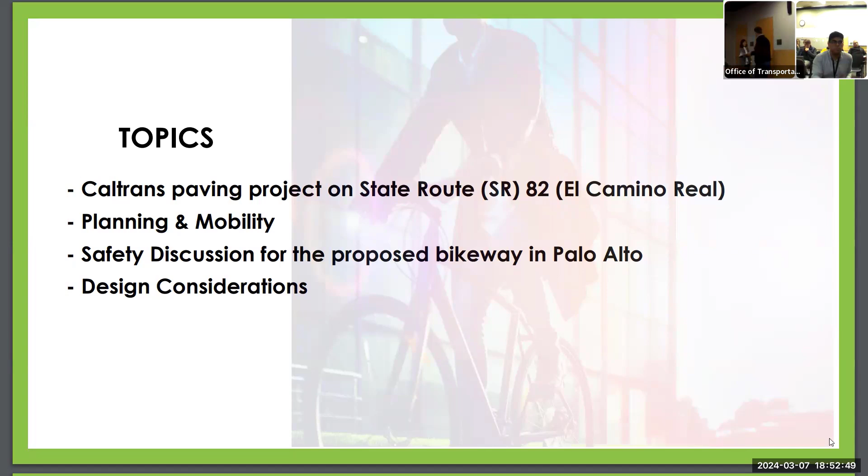Good evening, everyone. I'm Yumi Choi, Caltrans project manager. Tonight I'm going to provide you the overview of Caltrans' paving project on State Route 82, El Camino. The project limit is between the city of Mountain View and the city of Palo Alto. The construction cost is approximately $30 million. The main project scope is the following: pavement rehabilitation for asphalt concrete pavement and concrete pavement, upgrading curb ramps, driveways, and sidewalks to meet ADA standards. We're going to apply high visibility crosswalk pavement marking, as well as upgrading traffic striping pavement marking. Electrical work will include APS for crosswalks, pedestrian hybrid beacon systems in the city of Mountain View, and upgrading signal poles at several intersections. Also, we are adding new bikeways in the city of Mountain View and the city of Los Altos.

We are proposing new bikeways in the city of Palo Alto under this project. The new bikeway facilities will be implemented right at the new pavement. That's why we are here to provide you the new bikeway information. For schedule, construction has already begun, and we anticipate completion in the fall of next year.

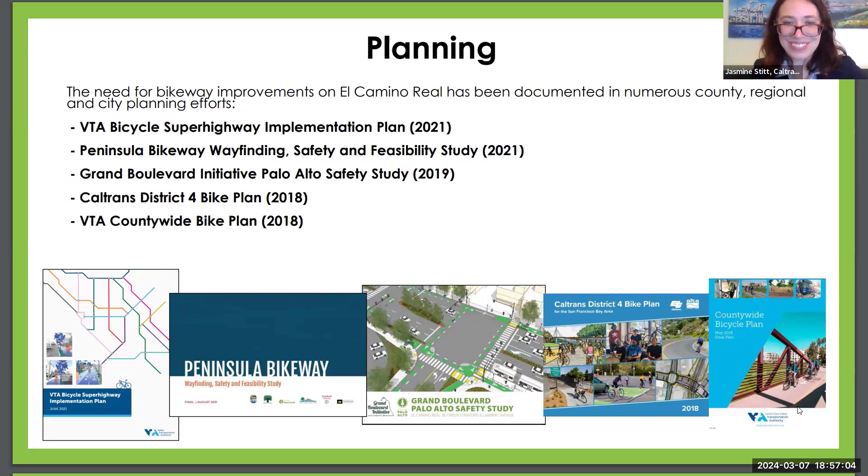Multiple bikeways are anticipated to be installed on El Camino as part of Caltrans' pavement maintenance projects throughout the counties. El Camino provides the most direct connection from San Jose to San Francisco.

Implementing a separated bike facility would provide the best and least circuitous route to jobs and activity centers for people biking and to provide regional connectivity. Providing comfortable bikeways on El Camino would link to the existing bikeway network and improve safety, including for those who already bike ride on El Camino.

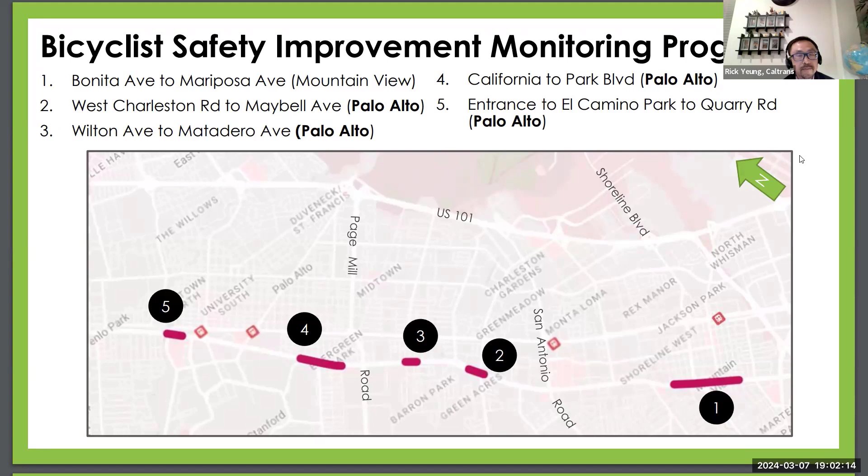Let me get into the description of the crashes and some of the statistics. From 2016 to 2020, across all 5 of these highway segments, we had 33 crashes involving bicyclists. 32 of them resulted in injury, and 1, unfortunately, was a fatality.

I want to point out two things about these numbers. First, the fact that we have 33 crashes tells us more than just that we have potential conflict—it tells us that bicyclists are present out on El Camino Real. Some of them have experienced incidents, and so we really need to do everything we can to try to improve safety for these vulnerable users.

The other thing I want to point out: if you go back a couple of slides, I was talking about our safety priority and our vision. If you look at these crashes, these are injury crashes, fatality crashes. These are the exact crashes we want to focus upon and try to eliminate from our highway.

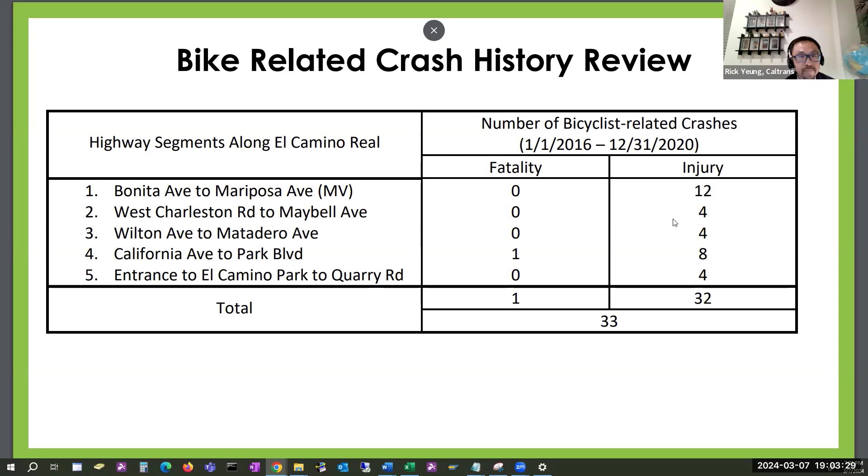When we break down the crashes by type, overwhelmingly, almost 80% of them were broadside. This is significant—in a broadside type of crash, the likelihood of injury to the bicyclist is significantly higher.

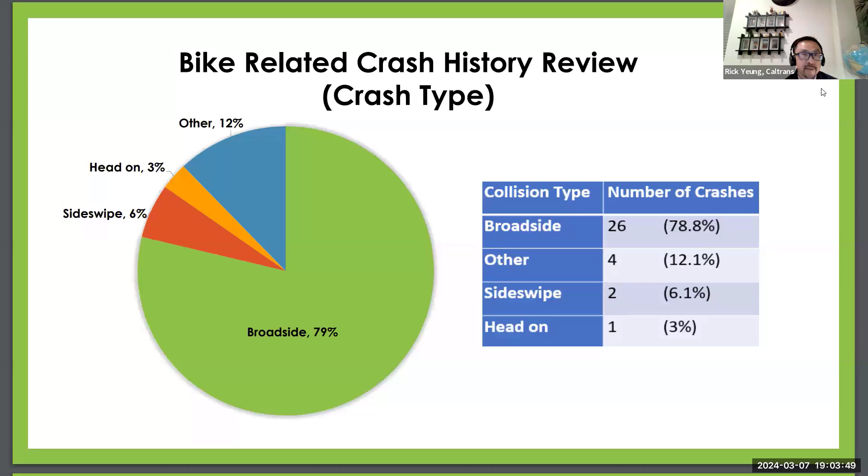We've also broken down the crashes by primary collision factors. Other violations was the leading factor at 52%. Failure to yield came in second at 30%.

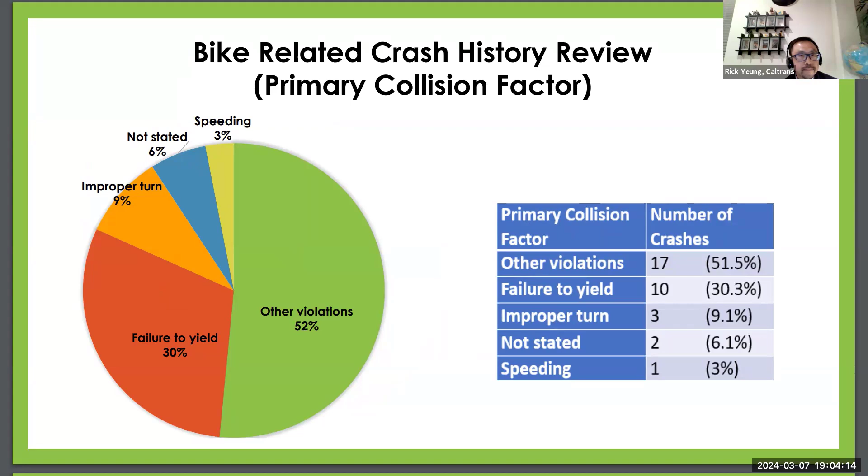In addition to looking at crashes by type or primary collision factor, we also group them into crash patterns so we can take a closer look at any underlying issue and identify potential mitigation measures. We've identified 3 patterns: first, driver's failure to yield; second, bikes going against the flow of traffic; and the last, red light violation.

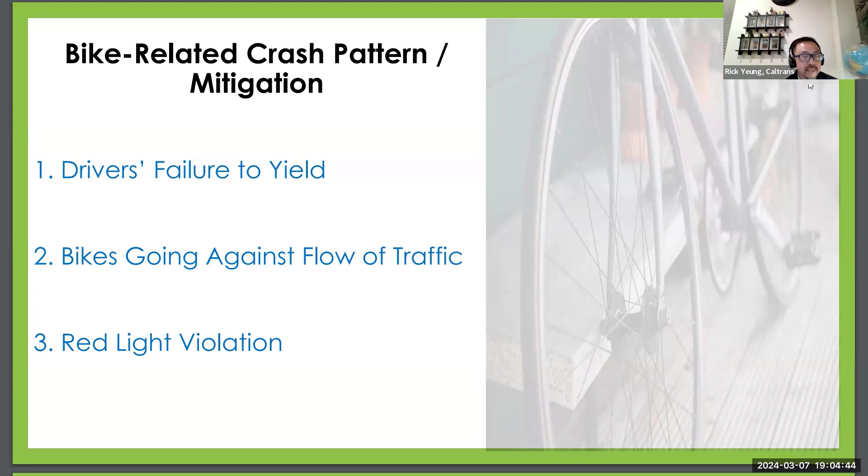The first crash pattern we found was driver's failure to yield. Some of the issues related to this pattern could be driver distraction, issues with visibility, or sometimes the right-of-way assignment simply isn't clear to road users. Some things we can do to mitigate this include upgrading and improving traffic signs and markings, ensuring clear line of sight especially at intersections or driveways, focusing more effort on driver education, and providing bike boxes at certain intersections to improve bicyclist visibility.

Our second crash pattern is bikes going against the flow of traffic, which includes both bicyclists riding on the street and on the sidewalk. Issues related to this could be a lack of designated area for people to ride bikes on the road, or a high stress riding environment on a busy roadway like El Camino Real. Potential mitigation measures include providing standard bicycle facilities where we can designate a portion of the roadway for exclusive use by bicyclists, and installing appropriate signs and markings to clearly indicate the direction of bike travel.

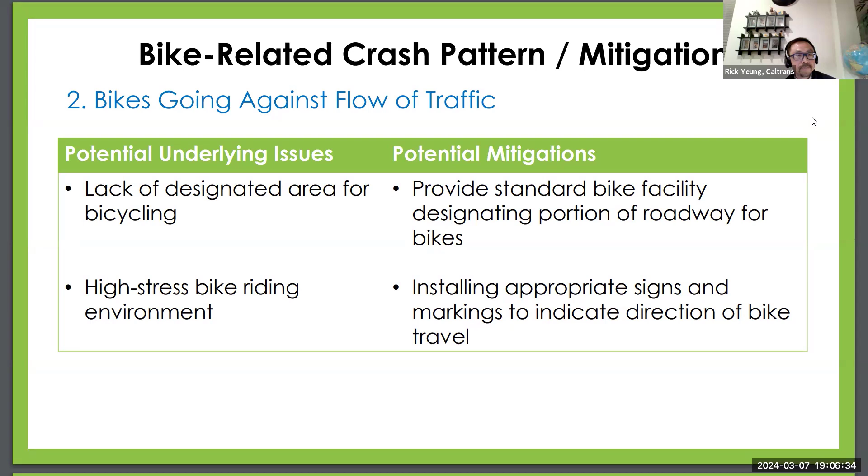Our last crash pattern is related to red light violation. Issues related to this could be speeding, or related to road users not being able to see the traffic signal. Sometimes there could also be an issue related to our signal timing.

Potential mitigation includes traffic enforcement, driver education, and working with our signal ops and maintenance department to make sure our signals are clearly visible to all road users, and checking our signal timing to verify the appropriate timings have been provided.

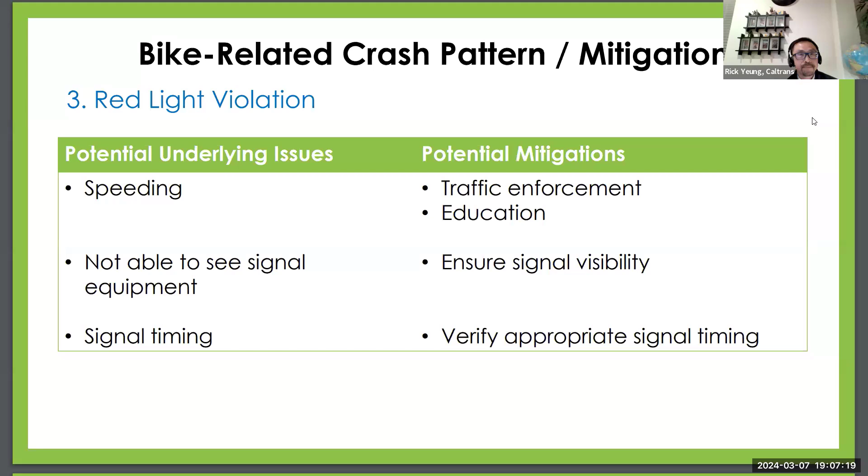Based on our safety review, we can tell that there are bicycle riders out on El Camino Real. There have been some incidents, and we definitely see a need to improve safety. So our recommendation is to implement a bikeway as part of the paving project on El Camino Real.

There are a number of benefits of having a bikeway on El Camino Real. I just want to point out a couple. Number one, it provides network connectivity that Jasmine mentioned in her portion of the presentation. It will reduce the incidence of bicyclists riding against the flow of traffic, reduce the potential for conflict between bikes and vehicles, and most importantly, it will improve traffic safety on El Camino Real.

I believe that is my last slide. Let me turn this back over to Nick and Yumi.

Thank you so much, Rick.

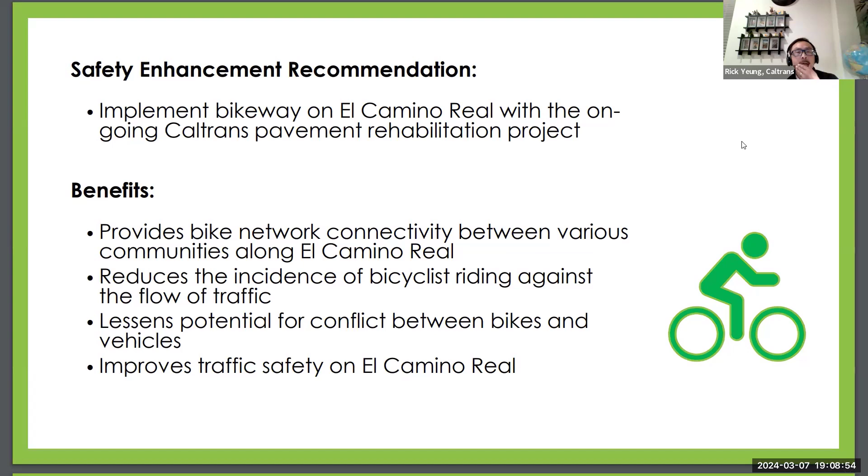We'll try to capture some of what went through the design, some of the considerations and constraints. Those constraints are right of way and on-street parking, intersections and driveways, and finally transit stops. We're going to cover each one of them with more details.

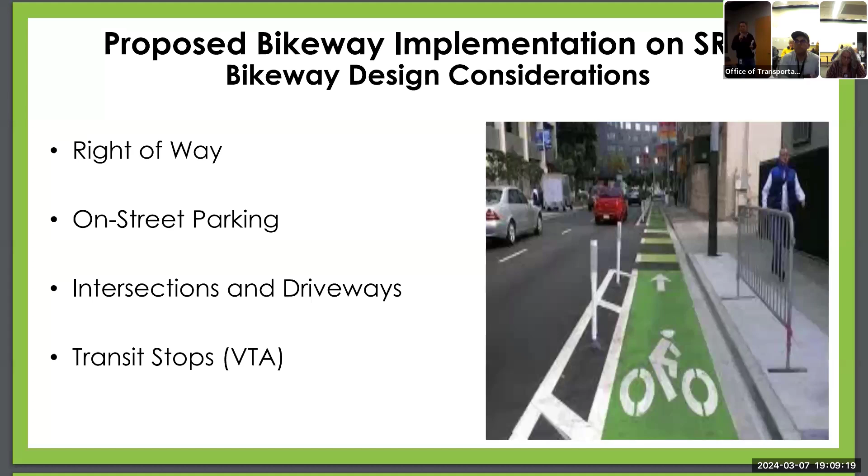As you guys know, El Camino Real is a very limited state right of way. It goes, typically in the corridor, from the face of the sidewalk to the other face of the sidewalk, though some cities differ. This project is not only in Palo Alto, it's actually across all 3 towns, so we didn't have a straight line for right of way.

The width of the right of way varies, going up to 130 feet in the best case scenario where it extends all the way to the back of the sidewalk on the side. But other scenarios are shorter, where the department only owns the face of the curb. In the case of Los Altos, it has only ownership of the sidewalk.

So with a limited right of way, that also limits and constrains your freedom to provide the full, complete facility as you wish, and we all wish.

Unfortunately, the current El Camino has 3 through lanes each direction, total of 6 both sides, and in some scenarios includes 1 or 2 left turn lanes each direction, and other scenarios have right turn lanes. So the width of the facility changes.

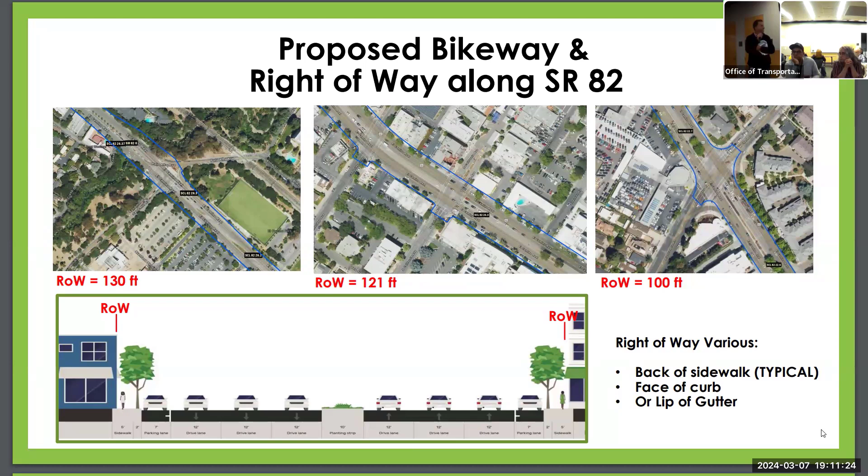Also, throughout the corridor between Mountain View, Los Altos, and the City of Palo Alto, there is street parking along the whole corridor. In the case of Mountain View and Los Altos, because they had an early start, they went to their city councils for resolutions to remove the street parking in order to accommodate the bike lane, creating more space or right of way to implement the bikeway.

In the case of Palo Alto, we anticipate it's going to impact around 603 cars or vehicles along the city. Again, this is a constraint — instead of providing a protected bike lane or Class 4 facility, it limits or minimizes your options, so you may end up with a bike lane that's Class 2 instead.

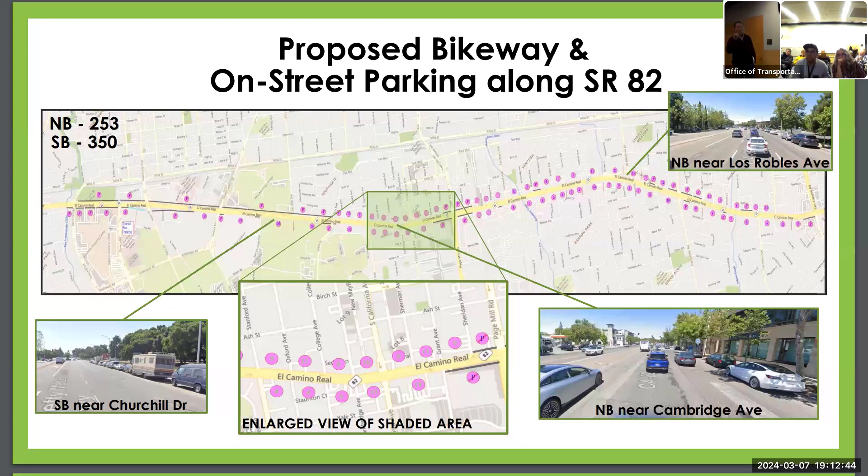This goes without saying, but a typical corridor like El Camino has a lot of driveways and intersections, which is very hard to manage because it also limits your freedom for continuous bike lanes and continuous Class 4 protected bikeways. This limits your freedom to implement a certain type and creates a lot of challenges. In addition, in some scenarios where you have a right turn lane, that also limits your options for a separate bike facility.

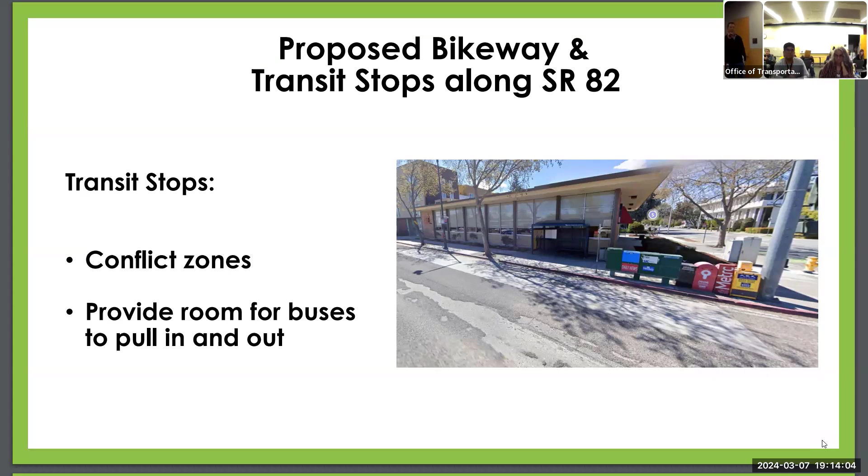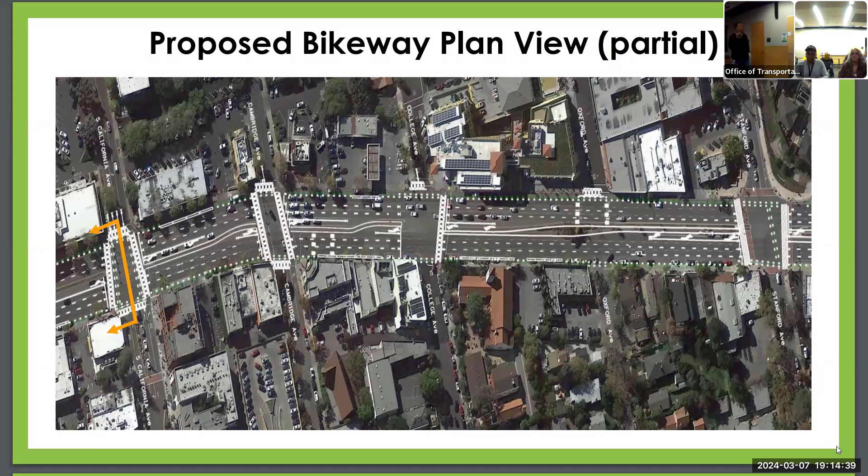Again, this is a typical section. It's not necessarily Palo Alto specifically, but through the corridor there are three through lanes each direction, in addition to street parking. With the proposed bike lane, in this case protected class 4, we'll maintain the through lanes and all movement in the corridor, and place the class 4 lane next to the sidewalk. This is typical through the whole corridor.

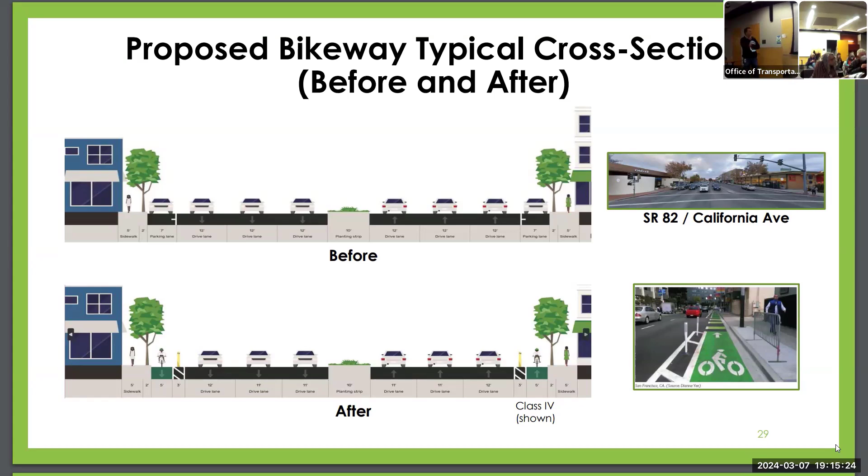This is another example of Palo Alto, showing how it looks today. I believe this is around California Avenue, and that's how it looks today. Hopefully after we finish construction, complete paving, and all the upgrades, it's going to look like this.

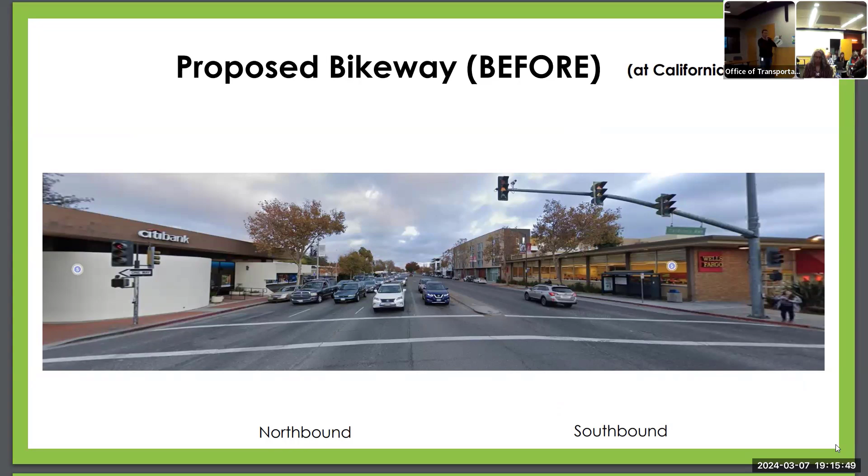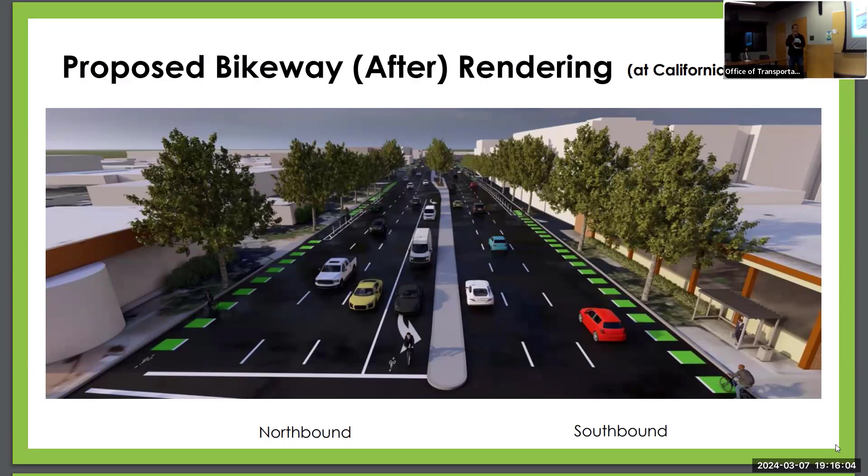So that's a typical section, picture, or imagination of how this is going to look.

We tried to look for other alternatives, considering a few things at a high level. Keep in mind these projects started as a paving project, a maintenance project to preserve the pavement and keep everything smooth, which badly needed a facelift. That was the original focus. But as Samantha mentioned, it's part of our goals and mission to improve safety and implement complete streets at the right time. We try to do things once rather than twice and waste resources, funding, and cause public inconvenience. So we considered all options to keep everything as we can.

In order to keep the street parking, we thought about various ideas. But throughout the corridor, it's very hard to implement a class 4 protected bike facility or any bike facility while keeping the existing street parking as presented today.

Another consideration we looked at, and actually did implement in some areas, was lane reduction within the allowance that still accommodates big loads and transit throughout the corridor. We reduced some lane widths from 12 feet to 11, and we're going to further look into whether we can go beyond this, in compliance with DIB 94 and other safety and geometric requirements, to see if that can free up more real estate throughout the corridor.

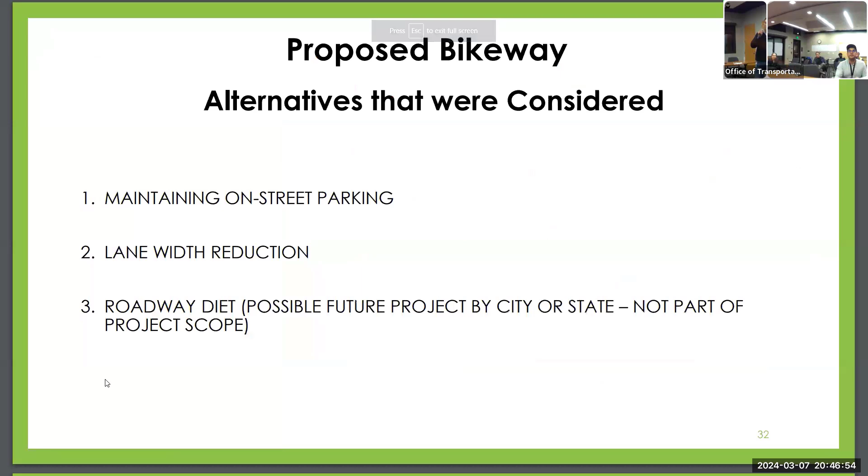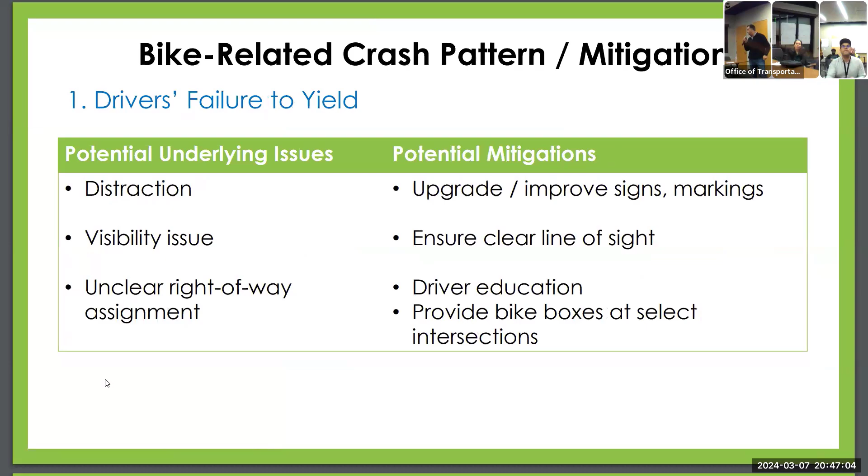Can you go back to that? I want to see the dates, but the project today is an active construction zone as we speak, and you could see a lot of trucks back and forth. The contractor has, I think, 200 or 300 working days to finish the project. So give and take the weather and when we can complete the work, they will give. But I'd like to see the dates, and I will clarify - we should have one date. And that date may be wrong, but we have one date.

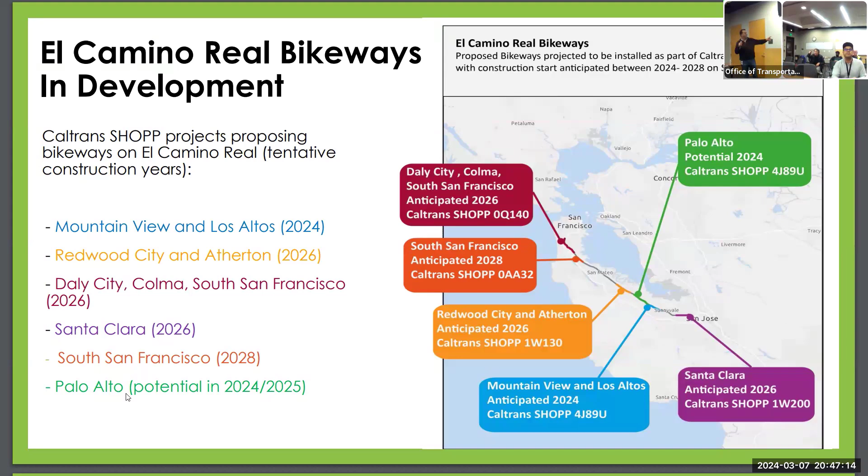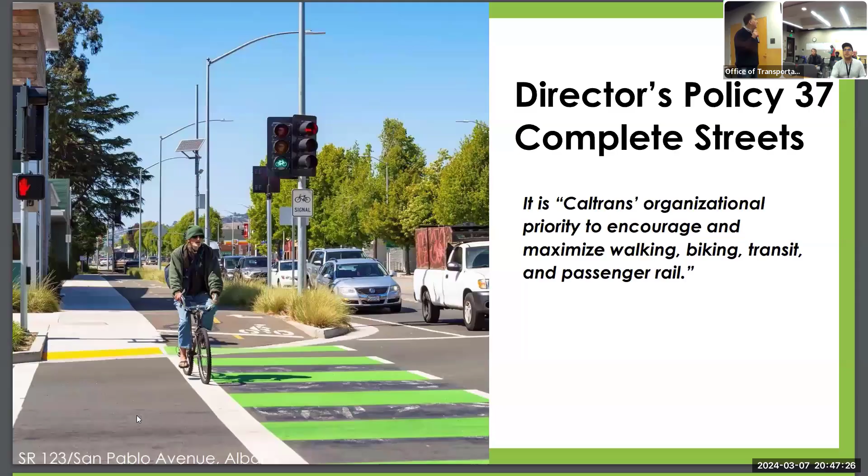Okay, so here in the top right, it says - that's not the project schedule, the 2024. Which one then? Go to the second slide, third slide. Yeah, this is actually the study that you're referring to. Okay, this is the schedule - construction and completion date. I'm not sure, but this is the only schedule, all of 2025. So that may be the schedule, according to...

Okay, it's gonna be implemented in the project - that's not a schedule, that's gonna be part of this project. Yeah, but the overall project, you think next - okay, the bikeway will be part of this project. The date you're looking at may be the one from when we just started talking about the bike lane and the safety, what we're talking about right now. Okay, so you're saying it's '25.

This is the date if weather and law constraint - so we say tentative because, you know, God knows what the future is. This is the completion of the project - paving, bike lane, electrical, striping - and that's gonna look like the picture I showed earlier. That's the way we leave it, that date represents that picture, throughout the whole corridor. It's not just Palo Alto, it's the whole thing.